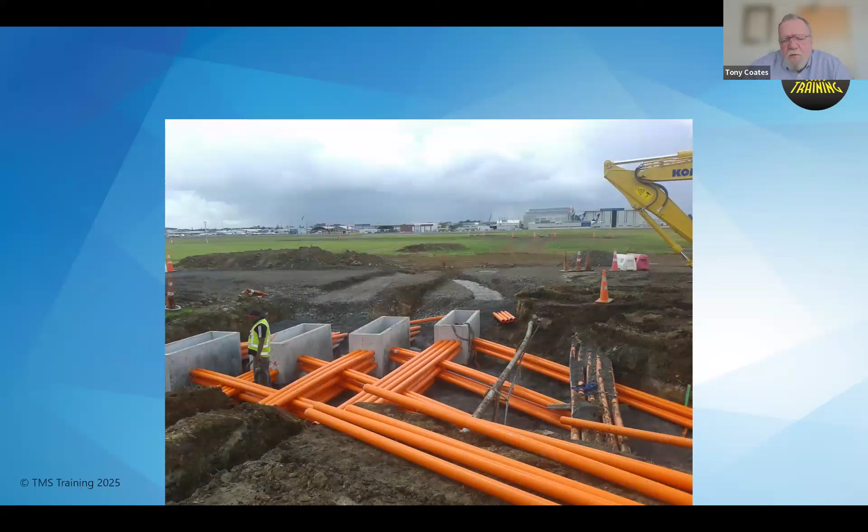But following on from that, we go into episode 2, and it may seem quite a mundane sort of subject, but it's something that every airfield technician comes across at some time in their working life, and that's working in or near a pit. Now, when they're laid in, everything's nice and straightforward, and it looks nice and neat. But when we start work at an airfield, normally the infrastructure is already there. It's an existing airfield. And so we look at it at the beginning. How many pits do we actually have? I think if you do the count of your pits, you'd be surprised how many. At the small airfield I used to work at, there were 78 pits there, and you wouldn't have thought it. But the next question is, where are they?

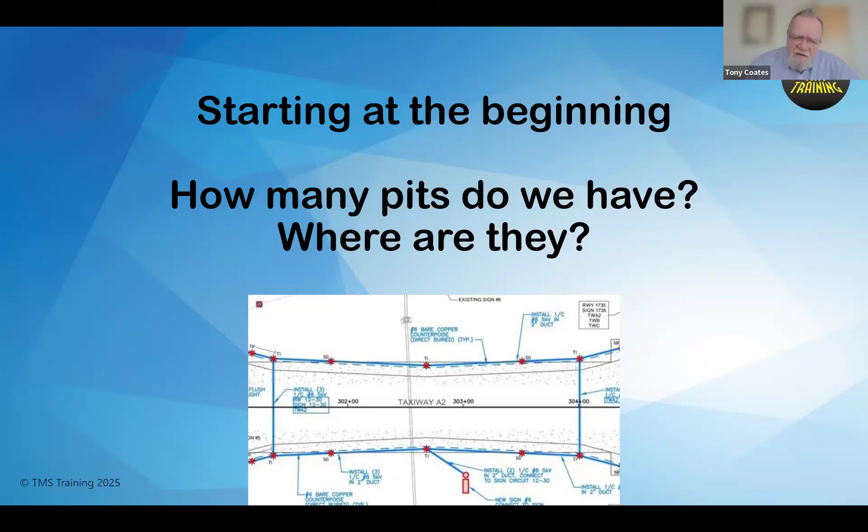Now, realistically, every single aerodrome has the requirement and the responsibility to maintain and keep up-to-date records and plans of the electrical layout and circuitry of the airfield. It must be maintained up to date, and it should detail all cable runs and pits, and depending on how detailed it is, the fittings. Now, this can either be on plans, or to a certain extent, you can integrate it into an asset management system so that you can open it up, not only seeing the location of the pit, but what there is in it. And this is something that we'll come on to further in. So can we access them? That's the thing.

We've now found that we've got 150 pits on the airfield, and we know where they are, but can we access them? Now, the ideal situation is you can get your permissions from air traffic control and get everything booked up and ready, and you can go along and you can open up the pit and you can work quite happily. If everything was like that, it'd be a wonderful life that we live.

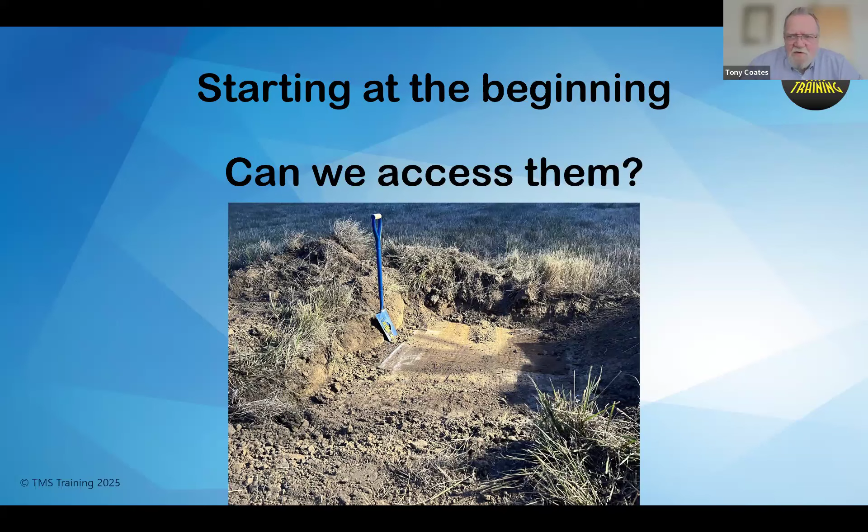But unfortunately, sometimes access can be a bit difficult. In fact, sometimes pits can actually go missing. And if you look at the edge of this pit, it was actually under a foot of soil and was eventually found. So access to that was totally impossible to start with.

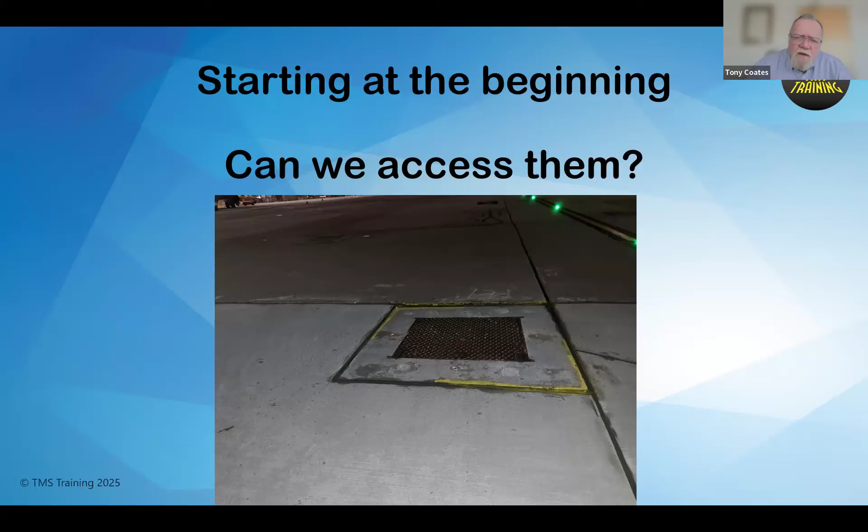This one, it's a small pit. It's on a taxiway, so we've got restricted access. We may be able to close down the taxiway for a period of time so we can do whatever's necessary, or it may be we've got to wait until the airport is closed.

So we now know where they are and what access we've got, but do we know what's in them? As I said in the last bit, we could actually create, as part of an existing asset management system, be it electronic or manual paperwork, a list of what's in there.

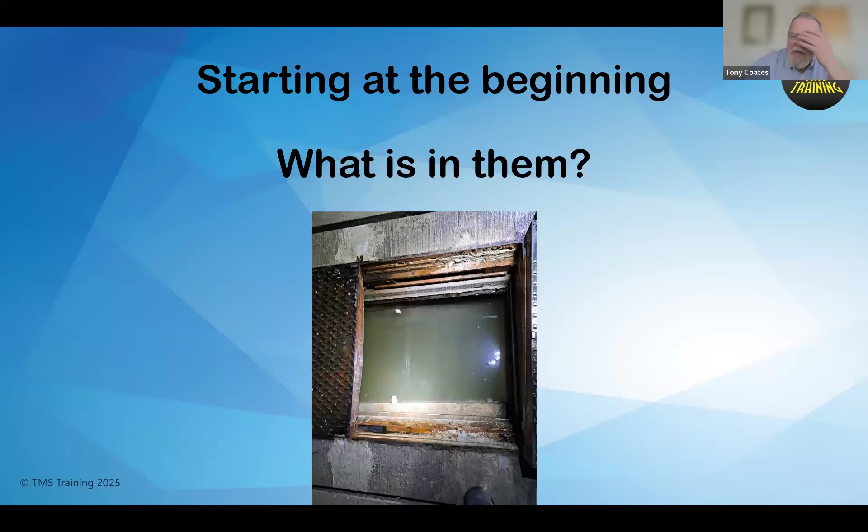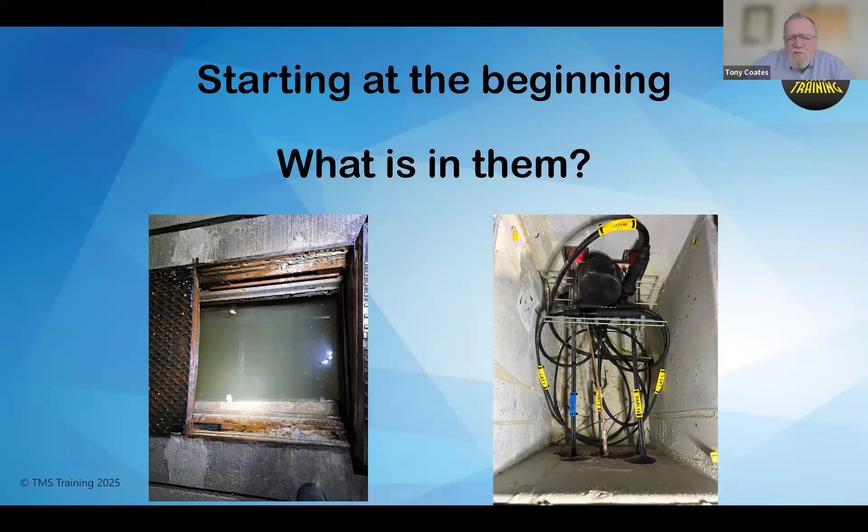But in order to look and see, hopefully when you lift the lid, this isn't what you see. You'd like to see something like the one on the right, so you know what's in there, all nicely labeled up, plenty of spare cables, so you can get to things easily. And normally you'll find that it's somewhere between the two.

The last thing you want to find is when you lift the pit lid, you've got undergrowth actually growing in the pit. It's not particularly good. It's not a nice way to be. So what is in them? To find out, we must raise the lid.

Now, at this point, I'm going to highlight the fact that the requirement for any work with pits to start with is there has to be a full risk assessment carried out in order to ascertain the potential dangers and hazards of just working in the pit.

Now, if you take last month's webinar and incorporate it with this one, you'll suddenly realize that working in a pit is not the mundane thing that people sort of say, oh yes, and by the way, every now and again you'll be lifting the pit lids and you'll be changing transformers. It's actually quite a hazardous operation.

And the purpose of these webinars, the last one and this one, is to actually get you thinking about what you're doing, your safety, your employees' safety. What do we need to do? Are there things we need to put in place? And that's the whole thing about this.

It's to get you thinking about a role which has actually been deemed as almost secondary to maintaining the lights and making sure that the runway is nice and clear and bright. So it's a very, very important and potentially dangerous role that you work when you're working in the pits.

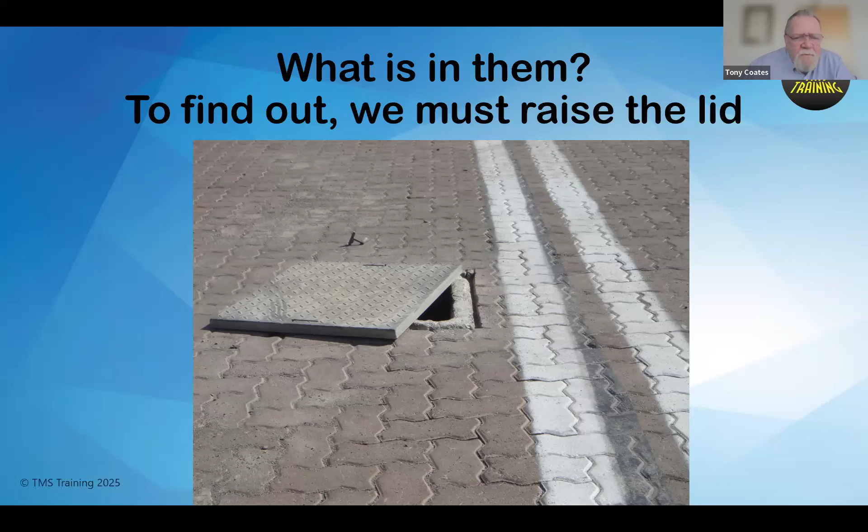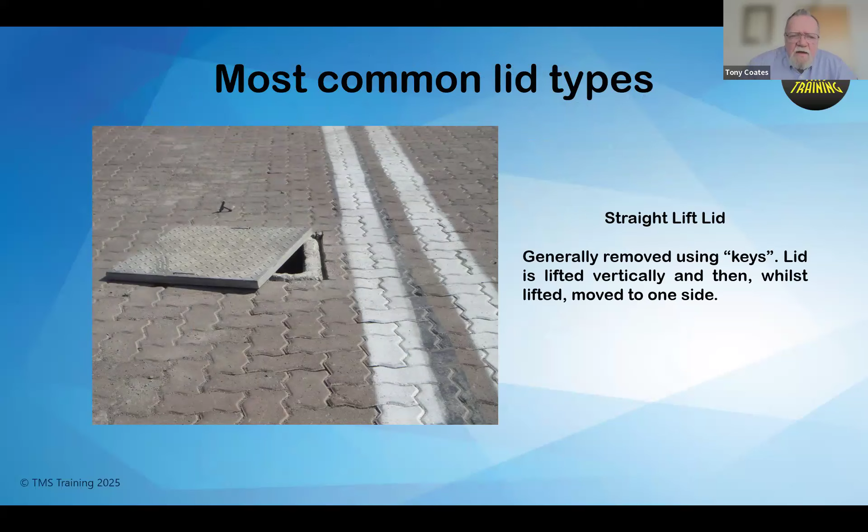So we've got different types of pit lids. Straight lift pit lid. Generally, you have metal keys that you put in, turn, and you just lift the pit lid off. And then it's moved to one side.

Lift and drag. You can just see one in the top right-hand corner. You have two large lever type bars that fit into the lids. You turn them and lock them in place, and then two people. And I must emphasize the point that when lifting lids, you should always have two people.

The two people then lift the end and drag them towards the direction that they're in, and it pulls it across the runners that you see on the edge of the pit. Now, one of the things I'll say at this point is that those runners get bits of dirt in them. Whenever you lift the pit lid, take that opportunity to clean not only the runners and the edges of the pit, but also the edges of the lid as well.

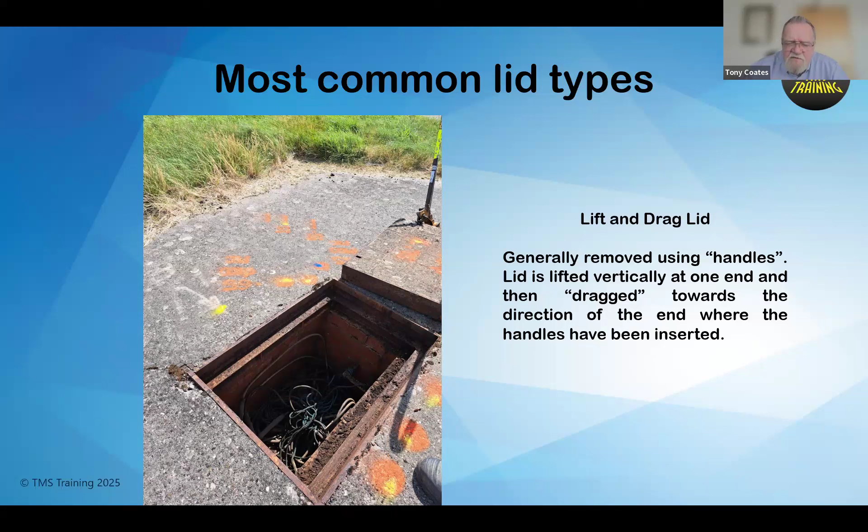So the third type is a hinged lid, generally constructed in sections. Quite often they're in triangular sections, and each section is able to be raised. Depending on what type of pit you've got, the actual sections can then be removed individually in order to, again, ease the access into the pit.

It was quite interesting speaking with Carl just before the webinar started. He was saying that the FAA requirement is that hinged lids have to have a bolt-down capability because of jet wash. So again, if you do have hinged lids on pits, think about where they are, think about what effect different things have on them.

And then the last type I'll mention here is the hydraulic. They're similar to a hinged, however, they have hydraulic rams which make it nice and easy for the lids to come up. Again, they need to be cleaned, they need to be maintained, they need to be lubricated. But the thing people forget about are the hydraulic rams need to be tested and checked on an annual basis. The last thing you want if you're leaning in a pit is the hydraulic ram to fail.

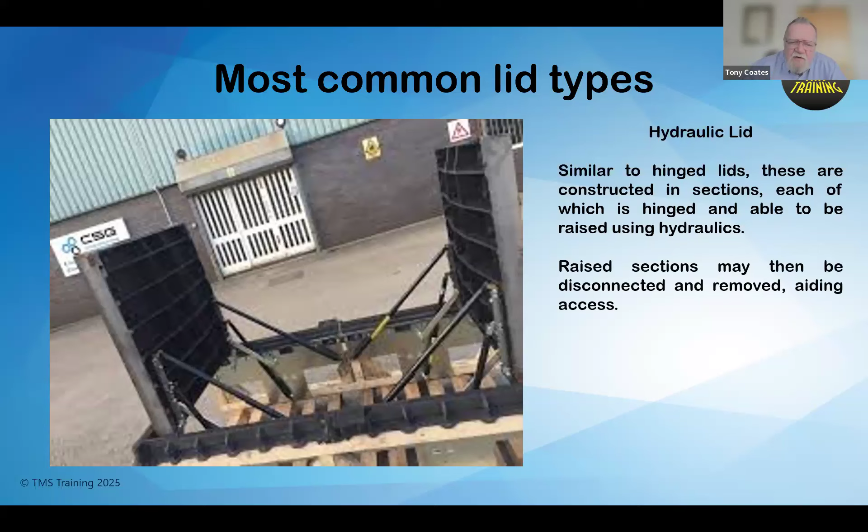And if you think, well, that sort of thing doesn't happen, if you think of a hatchback car where they have the hydraulic rams on the tailgate, I've seen quite a few of those in my time where somebody has to hold the tailgate open because the hydraulic ram has failed. They do fail. They do need to be checked. They do need to be almost, for want of a better phrase, calibrated to make sure they're working correctly. The raised sections, again, can be often disconnected, which allows ease of access into the pit.

But to make life easier for us, pit lids are heavy and lifting aids are available. And for every type of pit lid, there is a lifting aid available. But on top of that, because of the weight of the lids, in the UK and Europe, they come under the manual lifting and handling requirements in the UK under the HSE. So therefore, personnel need to be fully and properly trained in manual handling techniques. So that is something that, again, needs to be thought of and taken into consideration.

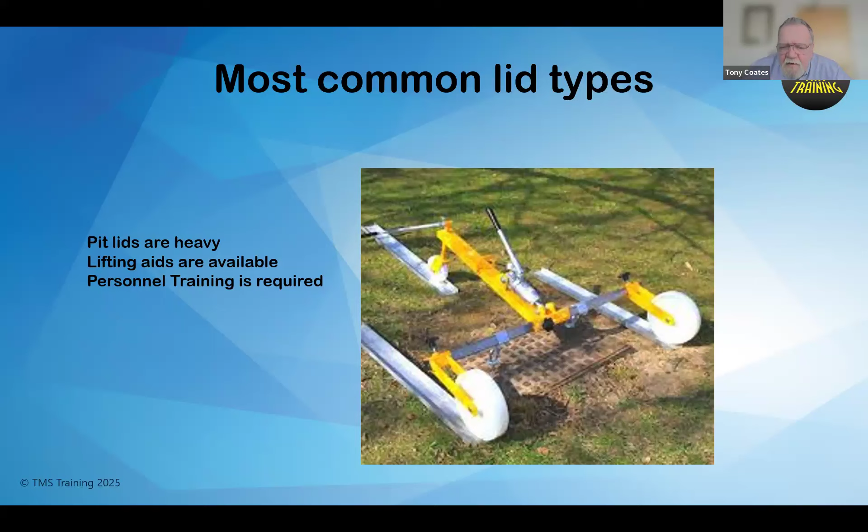The other thing about it is that manual handling technique certificate, depending on which regulatory body you have and also your insurance company, may last anywhere between 1 and 3 years. A lot of insurance companies are saying they have to be refreshed every 12 months. If you look at the ICAO requirements of training, you're looking at once every 3 years.

The other thing is that the lids need regular inspection and maintenance. Inspection, visual inspection, looking for damage, ensuring the lid is correctly seated. As I said, it was highlighted to me before we started this webinar, that under FAA regulations, hinged lids need to have a bolt down capability. The thing is, you need to make sure that every lid is seated correctly.

If you go back a few webinars, we did one on torquing. It's rather like if you have the incorrect torque setting on a fitting, it's liable to come loose. Well, if the pit lid is not seated correctly, it may not actually fly out of the way, but it could move slightly, which would create a weakness for anything going over it. So you look for damage, cracking in the casting. The majority of them are cast, so therefore they are vulnerable to cracking. So look for the damage.

Physical maintenance. Lids should be raised, and depending on type, seating should be cleaned and where appropriate lubricated. I showed the picture of the lift and drag type. It has runners. What I will say with that is do not put any form of lubricant in those runners, because any bits of dirt or soil that naturally move around fall in there, and it makes a conglomerate, a congealment of materials, which makes it very, very difficult to remove that lid. It almost creates a vacuum effect, which makes it difficult to break the seal to get the thing open.

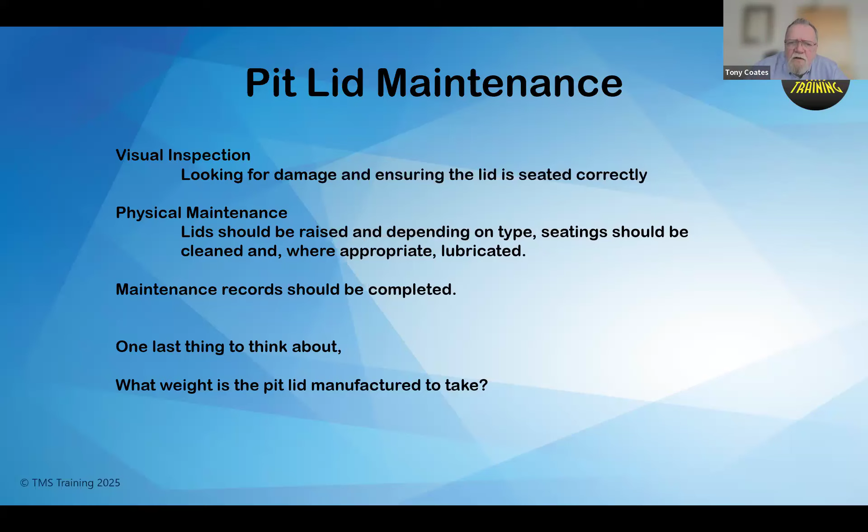And one last thing. Over the years, we've created larger aircraft. A lot of the initial infrastructure of airports was done many years ago, prior to the A380, perhaps prior to the 747. And so, is the pit lid you've got capable of taking the weight of modern day aircraft? You know, what does the manufacturer say?

These photographs, courtesy of Boeing, show an aircraft. All right, it's moved off the runway slightly and went onto the soft, but just in the soft was a pit which had a concrete lid on it, which at the time the airport was created was perfectly adequate for the weight of aircraft. However, this aircraft went over it, the pit lid collapsed, and it ripped the undercarriage off the aircraft.

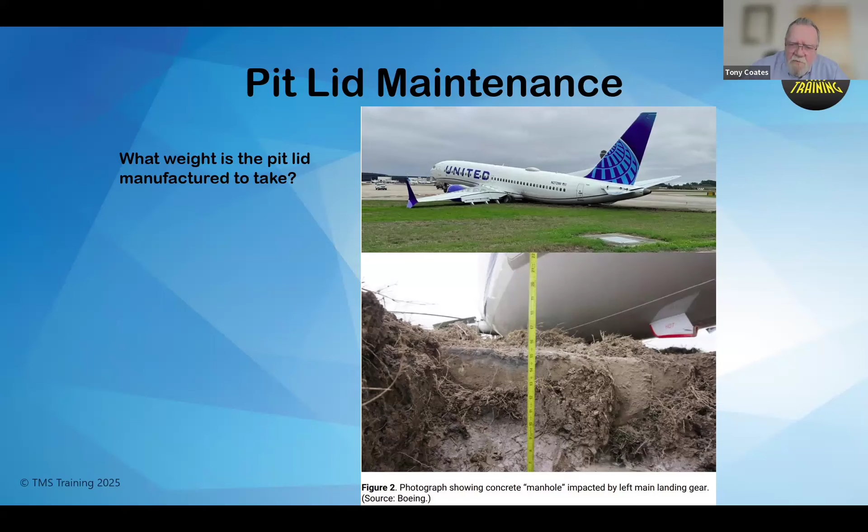So there's a thought: if you've got the larger aircraft now landing at your airfield, what's the weight? What weight are your pit lids manufactured for? The manufacturers can give you the recommendations with regard to weights.

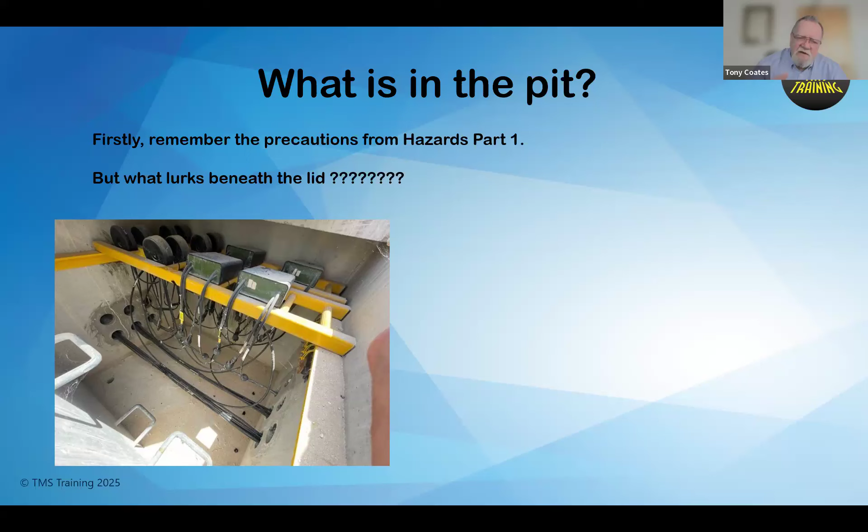That's the ideal situation. Unfortunately, several technicians, including myself, have come across a situation similar to this, where you look at it and you think, where am I going to start with this? I've got to find a certain transformer. I've got to find a primary cable. Where are you going to start? Normally, when you first get on, it's somewhere between the two, and slowly over a period of time, you increase the efficiency of the pit. And then, as we've seen previously, you might actually find something like this.

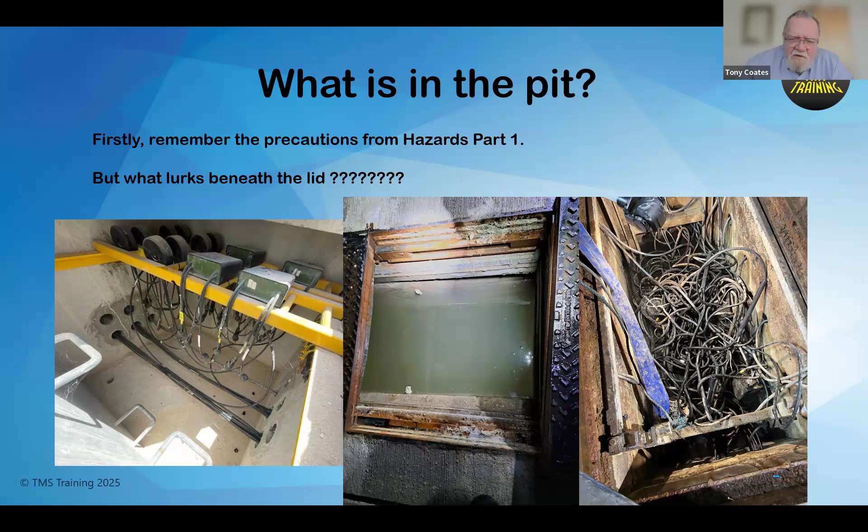Now, there are certain airports where they have tidal pits, where the pits are full of water when the tide comes in, because of the water table under the ground. I've worked at one of them, and it's quite interesting: when it's high tide, you can't open the pit at the end of the runway. When it's low tide, you can. So how are we going to retrieve the cables from in the water? Deadly silence.

The recommendation is actually to pump the water out of the pit, which is a great idea if you can do it. Unfortunately, very few aerodromes are actually horizontal, and definitely, when it comes to pit and duct, they're not horizontal. So you'll find that if you've got one pit full, the next pit up the chain will be 2/3 full, the next one up will be a third full. And so slowly you're pumping out the entire airfield. So you should be able to pump the water out to a safe depth, although there's nothing really safe about any water in a pit.

So you then have to hook the cables out of the pit. Please be aware that any hooks you use, because you're looking at primary cables, should have an insulation rating of a minimum of 5 kV, 5,000 volts. That is potentially what your maximum could be, so they have to be rated at least at that level.

A little anecdote here. I was at an airfield one time where they were quite happily showing off the new hooks they had made specially for them. They were absolutely superb, beautiful things, nice handles, well made, ergonomic. The only problem was they were made out of stainless steel, which if you've got primary cables going through a pit, may not be the best of things to have.

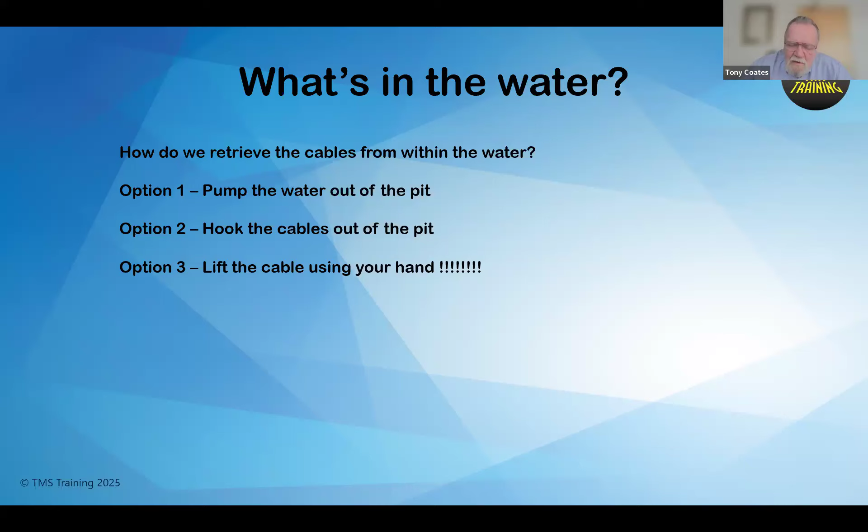Or you could lift the cable using your hand. Now, speaking as an airfield technician, I doubt there are many people watching this who have worked as airfield technicians who have not at some time lifted a cable out with their hand. Realistically, it is not a good thing to do.

The dangers, straight off: allergic reaction. It may be to a deposit that's on the cable if it's dry. It may be to something in the water and the moisture if it's wet. Because you've got electricity, all sorts of weird and wonderful chemicals, and a certain seepage of jet fuels and things like that, there's always a mixture of chemicals in the water in pits. And if you've got a slight bit of electrical leakage, then you start creating a reaction in there. So you may get an allergic reaction.

You could get bacterial or viral infection, just to cheer you up. And again, think of the last seminar where this was brought up: please remember that if you don't change out of your work clothes when you go home, that viral and bacterial infection is potentially on you. And you could give it to your kids, to your wife, your partner, whoever. So please be aware of that.

And the last one, which is the one we all expect, electric shock. Now, the two things that keep us safe in a pit from the electrical situation: the first one is the insulation resistance of the circuits. A high insulation resistance means that there is very little chance of you getting electric shock from the current that is going through the cables. The second one is having a zero earth leakage situation.

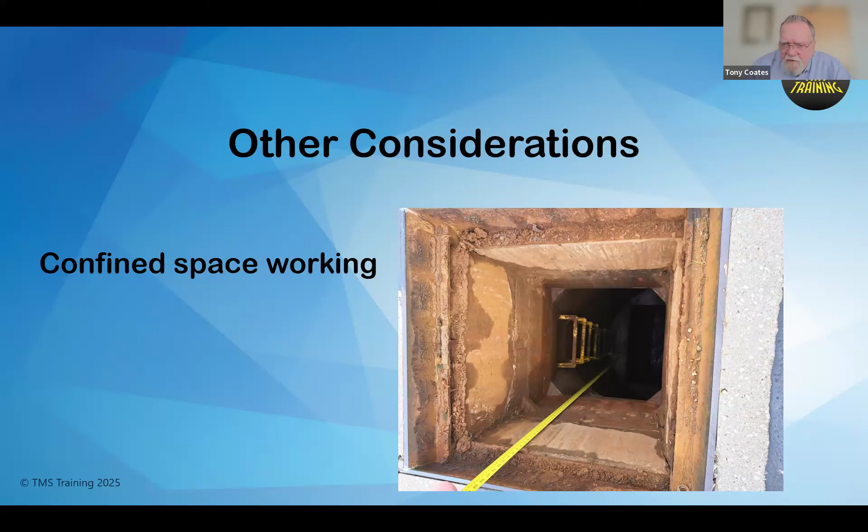Now, I know there's a couple of things that have come up which Carl has said there are differences with regard to the FAA. And when I get to the end of my little chat, I'll ask him if he could fill in the differences that he highlighted to me earlier.

Last thing I'll go into at this stage is the risk of fire. Unfortunately, moisture, electricity, arcing, it's quite a lethal combination. And you've also got the situation where in some pits, because of the nature of the layout, you've got control wiring adjacent to primary wiring, adjacent to secondary wiring. So you've got a range and a mixture of voltages and currents. So a slight bit of chafing on a cable, maybe owing to rodents in there, and you could potentially have problems.

Now, if you are approaching a pit and there is smoke coming out of it, the ideal situation, first off, apart from notifying the fire service on the airport or the aerodrome, is to isolate every circuit going through the pit. And this again means that you need to know what's running through there. You need to know the layout.

The unfortunate thing is that because of interleaved circuits, because of multiple substations on an airport, you could be running between 3 or 4 locations isolating circuits all over the place, which is impractical, especially if you're working with a 2-man crew. So if the fire service are available, you need them present. The least that you need is to have in your vehicle a fire extinguisher that is capable of being used on electrical fires.